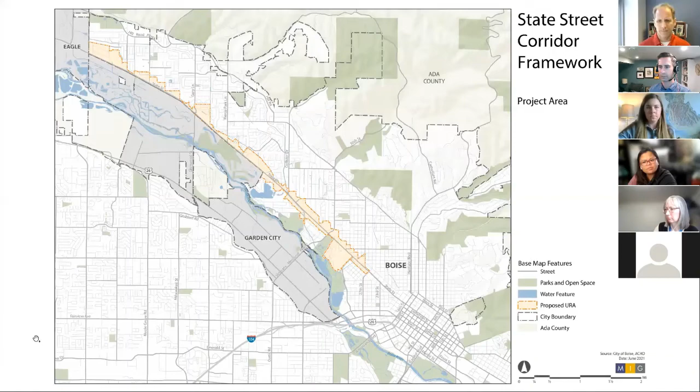The whole corridor is within city limits, so you'll notice the west half of it only takes properties on the north side of the road, because the south side is Garden City. The full width of the right-of-way, though, is within city limits and within the study area. Next slide, Alex.

So going back to why State Street, you can see a number of planning documents that have occurred over the years: Blueprint Boise and the State Street TTOP back in 2011, the corridor implementation plan done in 2019, and the Transportation Action Plan in 2015.

So the reason we've embarked on this effort is to make the corridor more walkable and improve the infrastructure along the corridor. That will in turn foster development to increase the housing supply and diversify development types, generally fostering transit-oriented development and implementing these previous plans.

So real quick, SB Friedman Development Advisors are doing a feasibility study for this. They've already got a draft out, it's on the website.

One of the first steps they did was a market analysis of whether it makes sense to put up an urban renewal district in this area, and whether there's demand over 20 years. Based on previous demand and capture in this corridor area, they expected to see about 1,100 single family residential units, generally away from the nodes, 2,600 multifamily units generally closer to the transit nodes, as well as 362,000 square feet of retail, 50,000 square feet of office, and one modest sized hotel along the corridor within that study area.

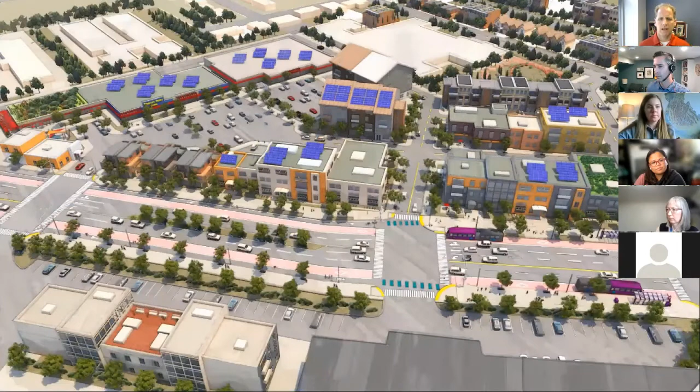And here is an aspirational rendering. This was in the 2019 State Street TOD implementation plan. This is not meant to be overly prescriptive - it's basically an aspirational concept, subject obviously to the market, to owner and developer prerogatives, which are in turn subject to regulatory approvals by the City of Boise and the highway district primarily.

But some things I would point out: we do expect to see infill opportunities at these older commercial areas, which would entail buildings that face the street, vertical mixed use with active ground floor spaces or uses, shared parking behind the buildings to improve parking utilization, and potentially structured parking where feasible - though structured parking is generally pretty cost prohibitive, so that would be used on a limited basis throughout the corridor.

Pedestrian oriented streets or drive aisles that are perpendicular or parallel to State Street, because as I'm sure all of you know, it's not the most comfortable street to be right next to. And then along State Street, we aim to make it more comfortable for people who aren't in a car.

Landscape buffers, possibly landscape medians with street trees, and consolidated access to minimize the number of breaks across those sidewalks and multi-use pathways, which are also shown here. You can actually see from the left side where you've got in-street bike lanes going to a multi-use pathway over by where those buses and transit stations are on the right. The reason for that is it provides a higher level of comfort for people that bike, rather than being right next to a road that has 30 to 40,000 cars a day.

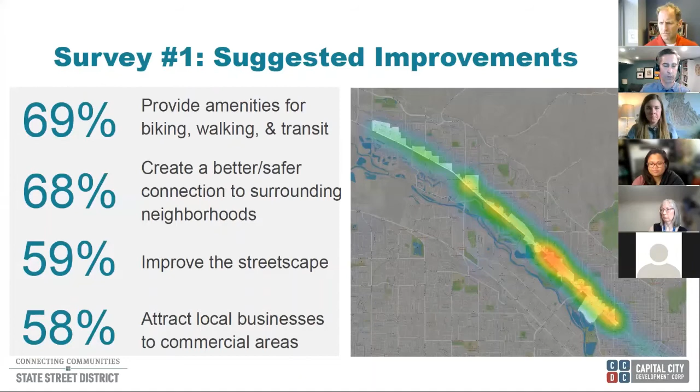People were very strongly supportive of supporting and growing local businesses there. We heard through the same meeting we did at noon that local businesses are really important to people along the corridor for daily services. Certainly continuing and supporting that through the project was important to the community here through this survey as well.

So in the second survey, we took all of that information from the first survey, as well as some additional technical work that the project team did. We asked community members to prioritize: if you had only limited funds, what and where would you fund those improvements? Where would you do bicycle and transportation improvements? Where are the highest priorities for transit investment? From an economic development or housing standpoint, what are locations in general we should think about as we consider these framework plans that we'll cover in just a moment?

Overall, the majority of people want to focus on mobility, primarily bicycle, pedestrian, and transit accessibility. ACHD and ITD already have plans on their side for the car side. These are the pieces that really go to support those other modes that happen along the corridor. Economic development, housing, and placemaking were also very important, but not to the degree of mobility issues. I think that's consistent with what we're seeing in the chat.

Just a definition of placemaking—what is it? It's parks, plazas, art, those key things that make a neighborhood or district unique, but also the areas that really allow people to congregate and talk and be outside with one another. So when we think about placemaking, that's a general term that applies to urban form, urban realm, art, and other amenities that bring people together within development.

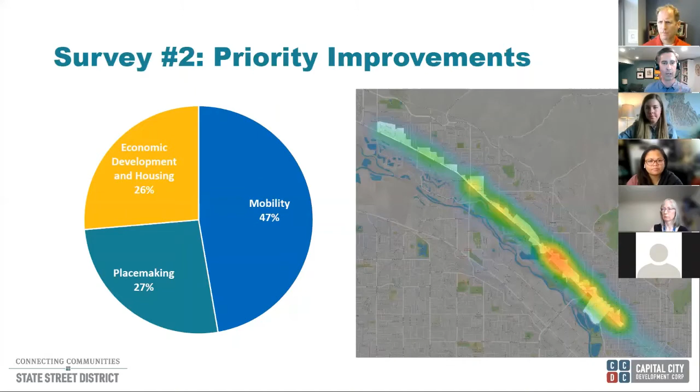All right, next question, the big question mark. So with this—if you've taken the survey, great, or if not, that's okay too—do you agree or disagree with what the public has said about State Street?

So really focusing on those core bike, pedestrian, and transit mobility issues, looking at economic development and housing, and focusing on those core public spaces within the corridor.

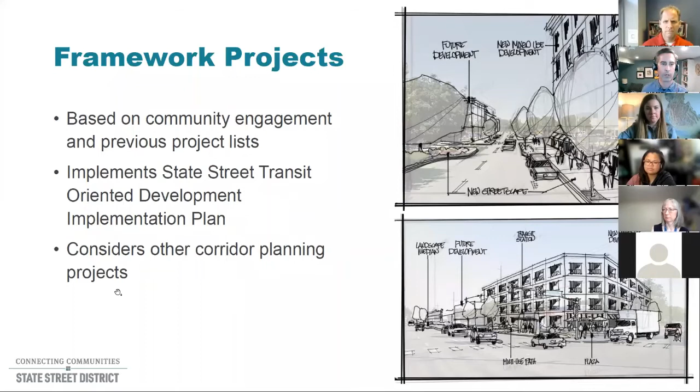So the framework projects are essentially the framework plan. It's the projects and the ways that we're going to be moving ahead within this corridor for the next 20 years. As I mentioned, many of these framework projects are based directly on the community input we heard through the first 2 surveys, and supported by both this meeting as well as the open house we just had at lunchtime today. They also include projects from other project lists and plans as they relate to the vision and goals for what this framework plan is.

For example, the Transit-Oriented Development Implementation Plan really focused on pedestrian and transit accessibility, identifying where specific station pairs might be located—that's something that has been carried forward within the plan. Those multi-use paths are something Matt has talked about that's become an ACHD guide. That's something we talked about previously within the TOD plan as a way to make pedestrian and walking and biking safer along the corridor.

It does consider other corridor planning projects, as we showed for that Collister illustrative. There's a lot of work being done in the corridor already, so we're looking at how these projects can support other projects happening throughout the corridor.

Just a couple comments: I'd like to see a greater emphasis on placemaking. Let's get into the projects. We do have a number of placemaking elements within there, but that's a great comment, and we appreciate that. We'll talk more about that.

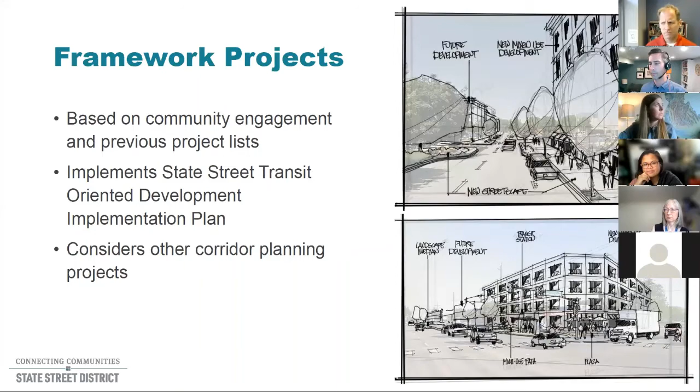So, project types. There are 5 big buckets of project types that we'll step through. When we talk about mobility, we're really not talking about auto mobility - that's something that will be taken care of with ACHD and ITD. We're really talking about transit, multi-use paths, local streets, potentially parking structures to access transit and support development. So it's really those core components around the State Street corridor.

Infrastructure is a basic element of urban renewal. It's supporting that adjacent economic development, future development. So it includes things like curb and gutter to separate the road from pedestrian and bike areas, water, sewer, fiber optic - those core pieces that support development.

Placemaking, and with the comments about placemaking, really looking at key areas of where people want to gather, whether those are festival streets, plazas, parks, and green space. Those are incorporated into these key areas or nodes we've been looking at. It's not always a traditional park - it could be a plaza, or a festival street designed to support a market or just gathering in a residential area. So really focusing on those areas where we can come together.

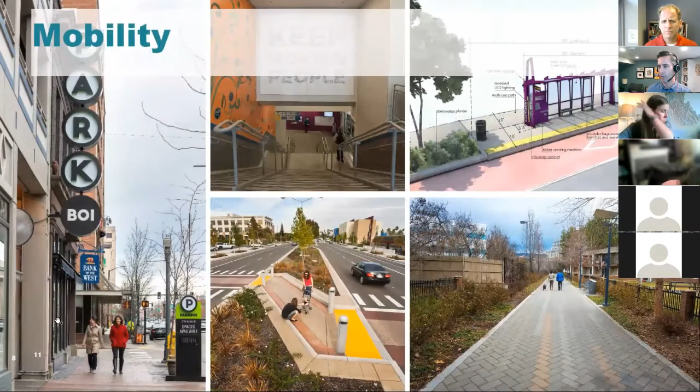So just some examples: mobility - it's paths, it's safer crossings for State Street, it's also parking, but also, in the upper right corner, better transit stations, areas that are branded that actually support higher capacity transit. Those are the key things that start to change a corridor, particularly for modes and how people use it.

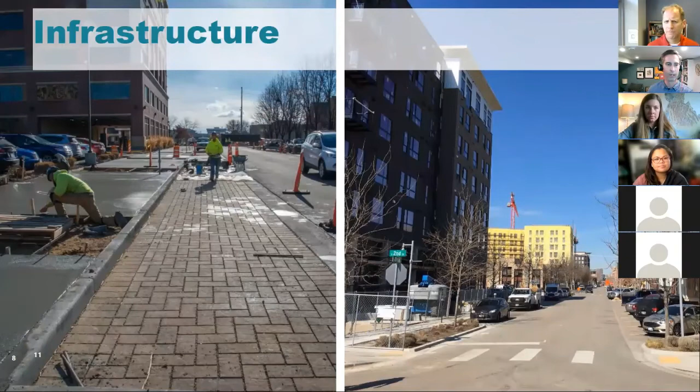Infrastructure, it's the bread and butter. It's sewer and water, the things that make everything work. Even though it's in the ground, it's very important for adjacent development.

Placemaking gets to some of those elements and comments. Placemaking is part of having the space to do it, but it's also programming - whether it's a festival street, a splash pad, or a plaza, something that's a place for people to gather. It's also wayfinding - how do people get around? Some of the comments about getting to the Boise River - how do people actually get to those green spaces from the corridor?

Economic development is a tool in many ways to support those community visions, focusing on housing and mixed use development within the corridor.

And then finally, those special projects: the historic elements, art components, potentially rehabilitation of some existing businesses or existing buildings. So how do you take an older building that's maybe not maintained and create something new that's different, that's unique?

So let's jump into the projects real quick. These projects - we've broken out the corridor essentially into a number of nodes, a way to focus it somewhat around transit, but also where there's that opportunity.

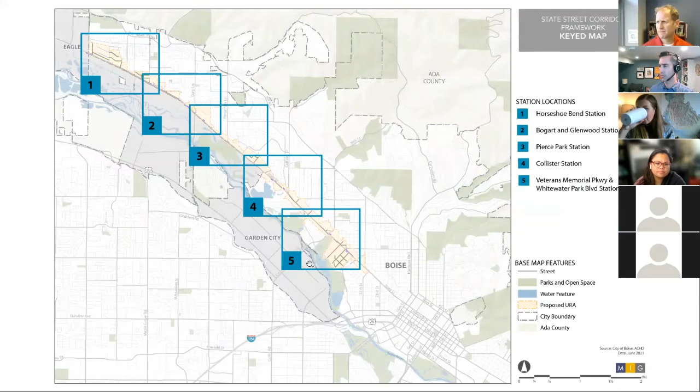So we'll step through 5, starting actually at the bottom with number 5 and Whitewater Park Memorial, Veterans Memorial Parkway, and going to Horseshoe Bend.

So with this section, looking at the Idaho Transportation Department headquarters, this has been an area that we've looked at a lot. The city has looked at it a lot. It's really kind of the major place where investment could occur throughout the corridor. And as such, a lot of investment through this plan could occur as well too, which could include utilities, local streets, potentially parking structure, public amenities, placemaking. But also when we see these big T's along the street, those are new premier transit stations. So those are branded transit stations that can support high capacity transit like Bus Rapid Transit, which provides faster headways and a more premium service throughout the corridor.

We also, in this area and a couple of the others, so you'll see these insets in a few of the stations. These are locations that we looked at as a part of the transit oriented development plan. And so we actually looked at concept development for each of those. So you'll see the infrastructure mirroring what we showed in those areas. Some of the other pieces, more in the neighborhood, some trail connections.

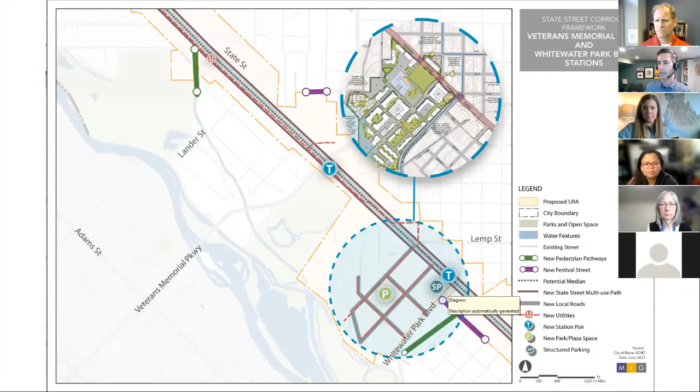We're getting better access to the trail from State Street, the small Festival Street up here, which is more of a residential connection, but also other investment outside of that ITD site in this area. As I step through these, think about State Street from a corridor standpoint too, a multi-use path up and down the entire length of State Street. So that is another investment that would happen within each of these corridors, as well as utility and median as needed to support the future development.

When we move to the west, getting to Collister, it's actually a couple different station pairs. So new transit stations at Collister, and then just to the west. And these are areas where potentially investment in shared streets, in festival streets, and smaller connections for pedestrian pathways to be able to provide that connection to transit, but also better connections into the neighborhoods for bikes and peds. Looking at park amenities, particularly within these two areas that have either the canal or other things we could build upon, but that don't have a ton of parks right in that location to be able to support that.

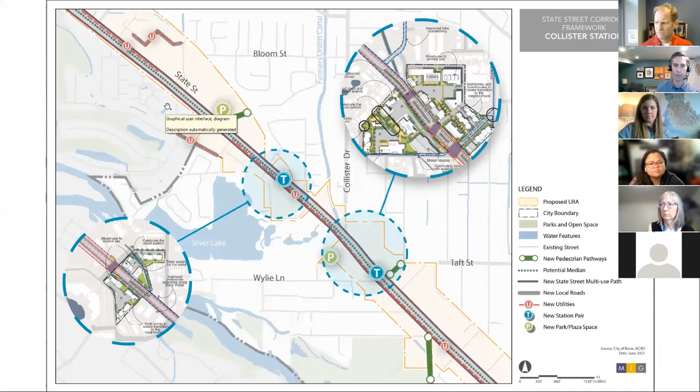And then as we move further west, Pierce Park Station is really more about some local connections and utilities, really focusing on the station in this area.

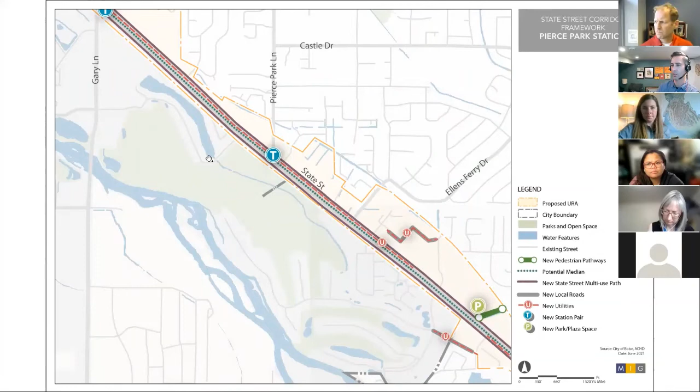And then with Bogart and Glenwood, we did a lot of work on the Glenwood station to think about how that might change over time. This is an area where potentially structured parking might occur at some point in the future, but also higher access to transit as well as parks and public spaces within both the Glenwood station, but also the Bogart station as well too. We know there's a lot of development that is occurring or will occur here soon, and to be able to support that through public space with access to transit is an important part of that specific station.

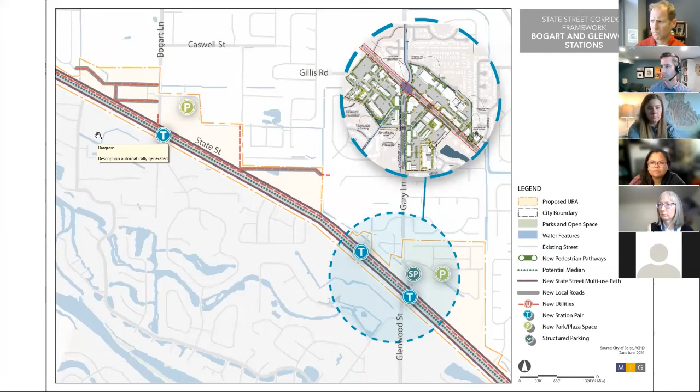And then finally getting to Horseshoe Bend, to the furthest west of the framework plan. This is an area that is lightly developed. It has large parcels, but not a lot of access for future development. So looking at what a future local street connection or system might look like to be able to provide that access, but also being able to provide the utilities to be able to support that. So again, another transit station as a part of this, it's a core element of the plan, coupled with supporting economic development through some of those local infrastructure improvements. And again, park space as well too.

So the question about placemaking is wanting to see more of it. There is a lot of that within each of the stations, but it's also, you know, in relationship to all the other projects that are happening there as well.

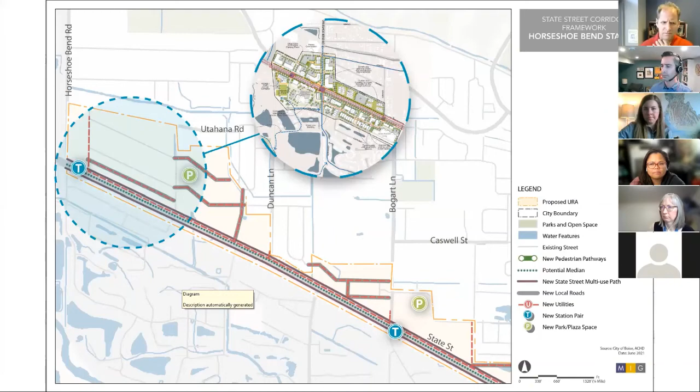All right, so we have 2 questions here as we step through that. All right, so I see a couple of questions come in. I'm going to start this one, and then we'll review the questions and get back to you.

All right, so the first question is, there were a number of projects on the maps. What should we do first? And so we've broken these into the buckets: mobility, infrastructure, placemaking, economic development, and special projects. Those are those 5 buckets we talked about prior to the frameworks.

All right, about 15 more seconds. So as folks are finishing up answering there, I think this is a good question for Karen. At what capacity are buses being used right now? And why do we think people will use all of this new transit?

Go ahead now while they're still filling out the survey. Sure, is that okay? Okay, that's okay. So yes, right now coming out of COVID, the buses are running below the levels they were pre-COVID. But that's not unusual for us, or I think any other cities at this point.